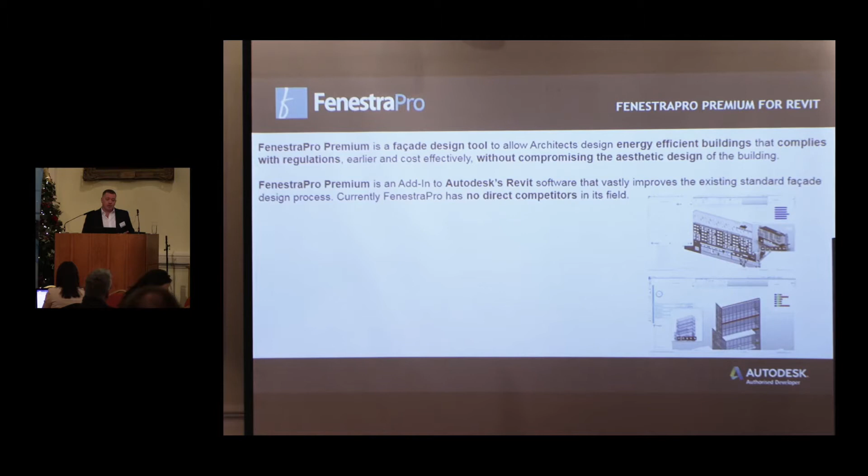We've got no direct competition. There are analysis tools out there, like Insight 360 or Sefaira or IES, for example, but we're very much complementary because we could be used much earlier in the process. We work closely with Autodesk in terms of that complementary nature of early stage design around the facade, with the likes of Insight when you get into doing your full end energy analysis, as they describe it.

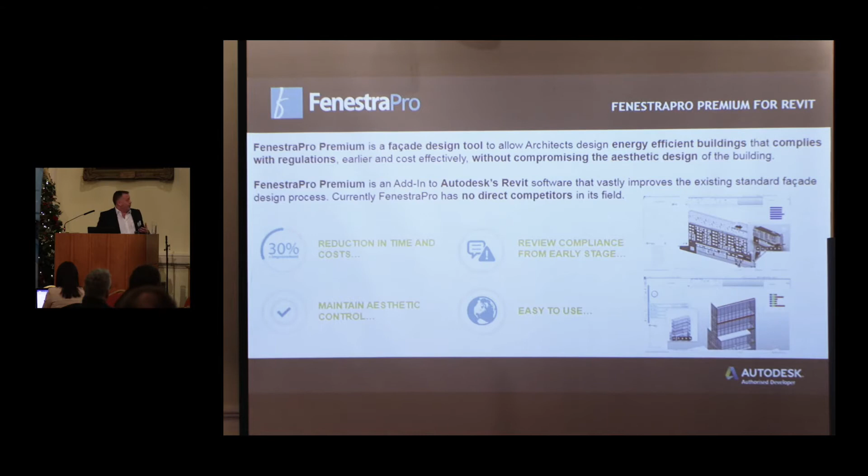In terms of the value we offer customers, we give architects the ability to understand their design decisions and strip out a lot of the complexities typically associated with HVAC, lighting, systems and boilers. You're giving architects the tools to understand the impact of their design decisions.

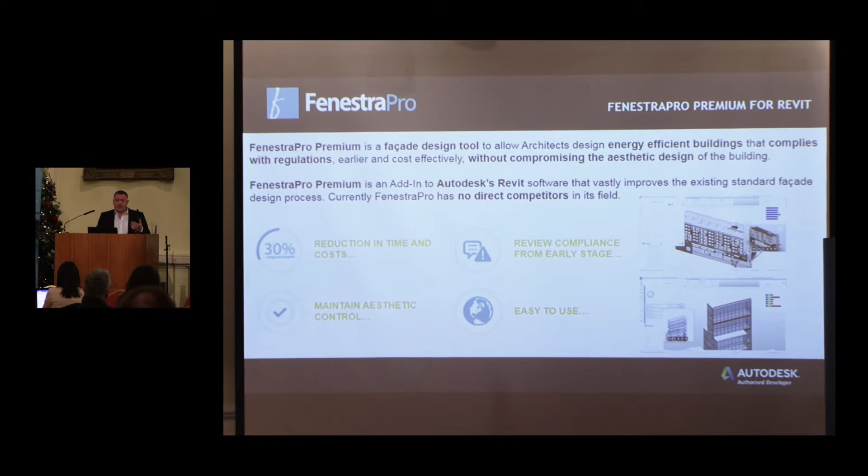If you think about it, the facade is the primary moderator between your internal and external environment, and influences over 50% of the energy performance of the building. But it's also the realization of the building. Coming from an architectural background, what we've tried to do is marry performance with the desired aesthetic.

By giving architects understanding of those implications early in the process, it improves their process. They effectively eliminate the need for late stage redesign once the engineers get involved and start looking at what impact the facade is having on the building. Because they already have a good understanding of its performance, they don't have to redesign. So it's a good improvement.

From an architect's point of view, one of the softer benefits of FenestraPro is that it gives them the ability to maintain control over the aesthetic, but also enables them to review compliance from that early stage. One of the key things is that our software is really easy to use, and because we strip out a lot of the complexities I mentioned, it's available to the full design team.

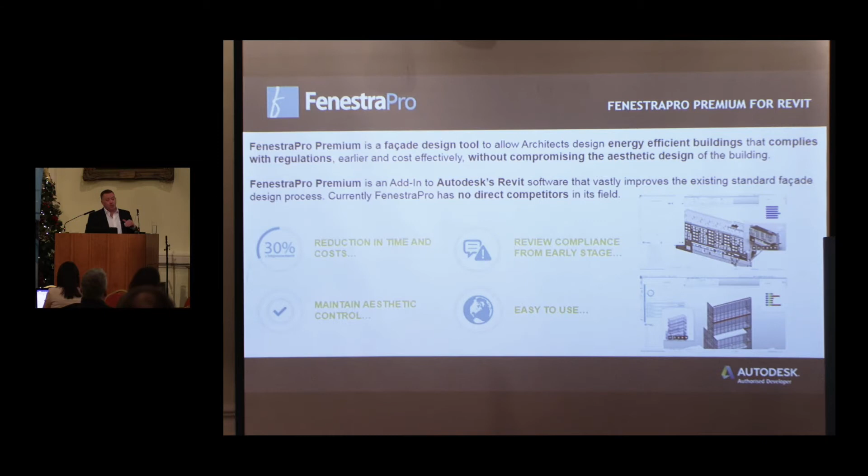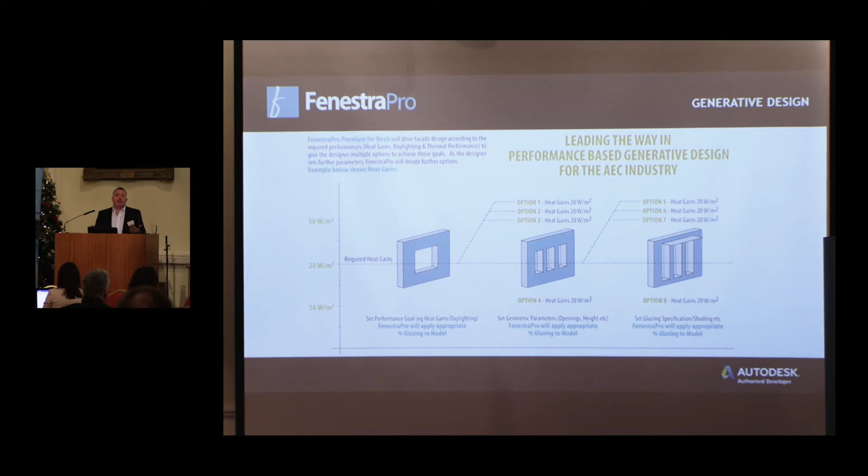I mentioned that we're an add-in for Revit, which enables us to read from, but also write to, the model. As you're establishing these key design parameters, we see ourselves as leading the way in generative design. You can set performance criteria, establish your glazing configuration to meet the aesthetic, and then automatically generate facade solutions. You'll see that in the quick demonstration I have here.

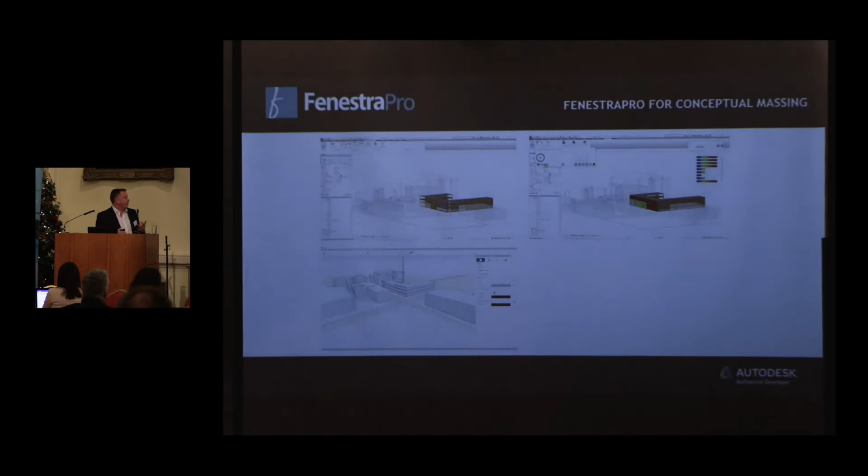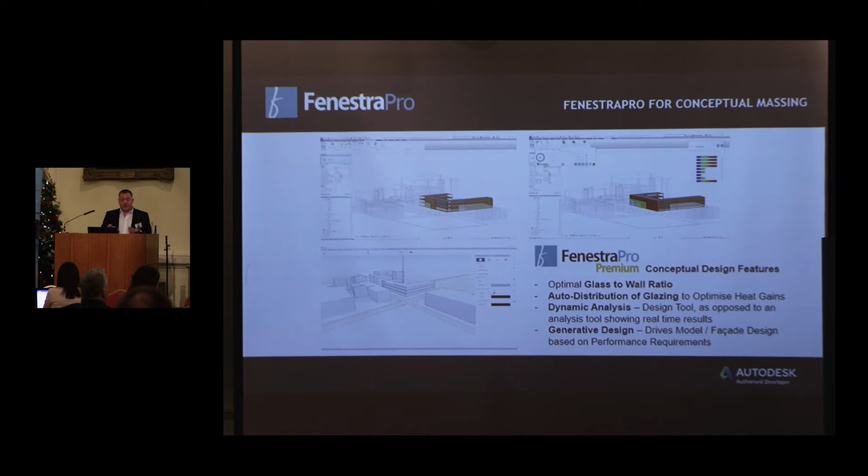We work from the earliest point of the process, through the conceptual design tools in Revit, all the way up to detailed design. In the conceptual tools, we're focused on establishing your glass to wall ratio based on thermal performance. We look at how you optimize the distribution of glass depending on orientation, location, and the impact of surrounding buildings, to maximize passive heat gains while maintaining daylight levels.

In the detail model, you're moving from a conceptual stage, where you don't necessarily have elements within the model, to a detail model where each window has a performance criteria typically set in the analytical properties. It becomes about the specification of the glass and what kind of shading you need based on those things. A big part of what we're doing is also producing data.

We use the Forge platform to present our key findings in terms of the data highlighted around heat gain, daylighting levels and so on. We also have an Excel export function that gives you the ability to report back to clients. The best way to talk about Fenestra is to just give you a quick demo, a quick 2-minute video.

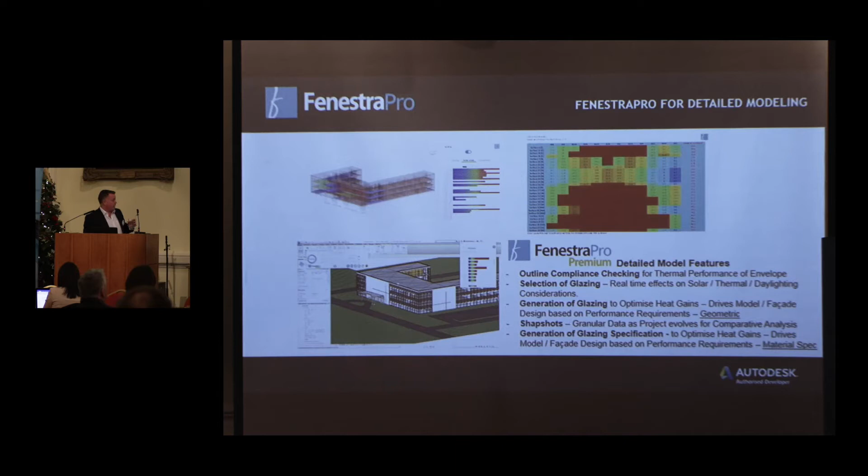That I can talk through as we go. Once it plays, there we go, we've got it.

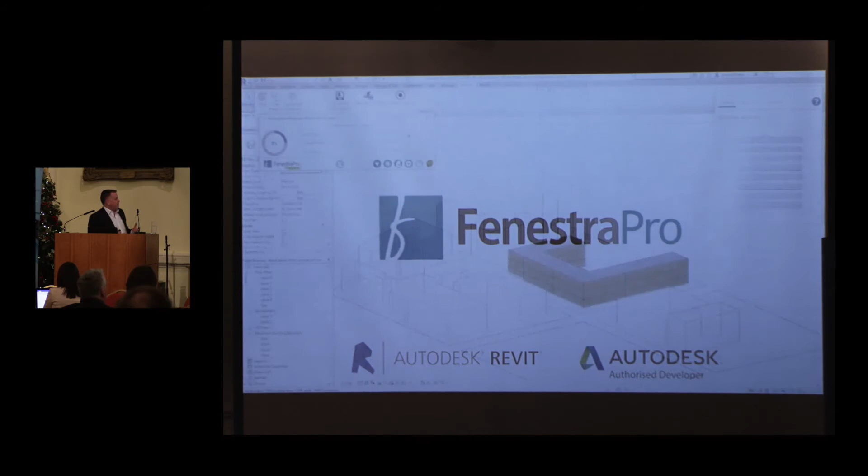As I mentioned, we work very much in that early stage piece, within the conceptual design tools in Revit. What we're doing is establishing, based on your typical high-level U-values for your roof and floor, the U-value for the facade itself. When you put in your glass performance levels and wall performance levels, it tells you what your glass to wall ratio is.

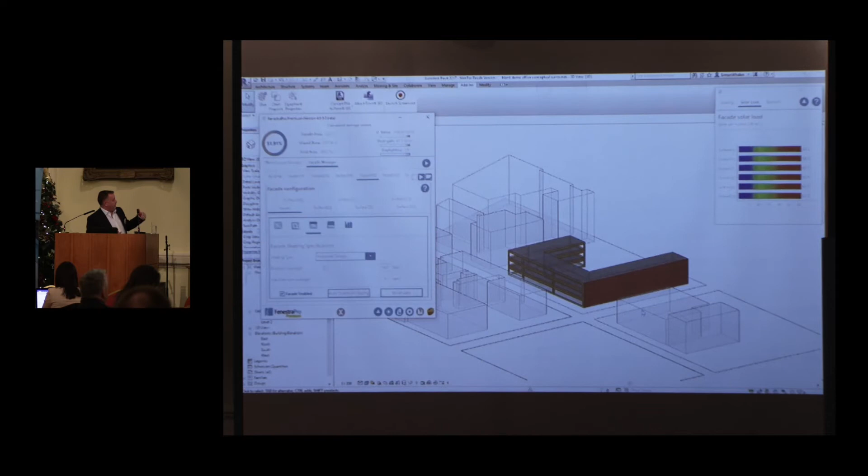As you start making those changes, it writes directly to the conceptual model in this case. You can then start looking at the impact of shading devices, and as you change the shading within Fenestra Pro, the impacts of that can be seen when you recalculate.

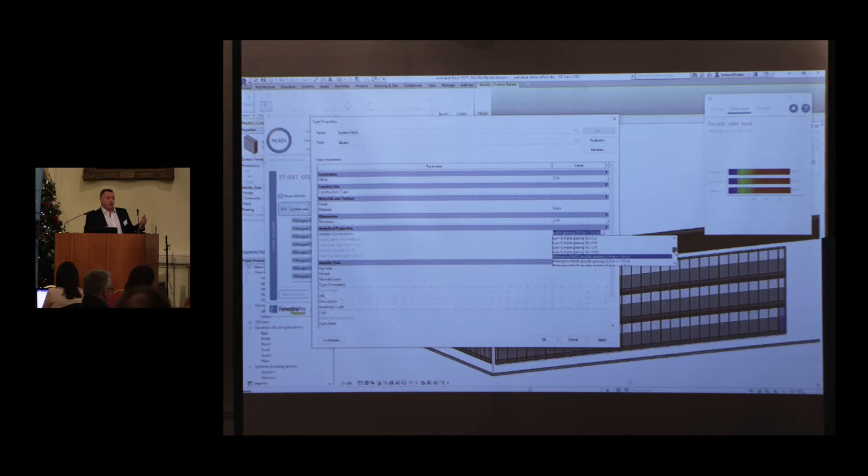You'll see constantly where you can see your thermal performance levels, your daylight levels, and your passive solar heat gain. When you move into the detail model, we're very much around how you manage specification of materials. This is appropriate for the work we're doing around Quantum, whereby you can select the glass material, all managed through the analytical properties within Revit, using the constructions XML file. You can change the glass and look at the impact those changes have on heat gain and daylighting.

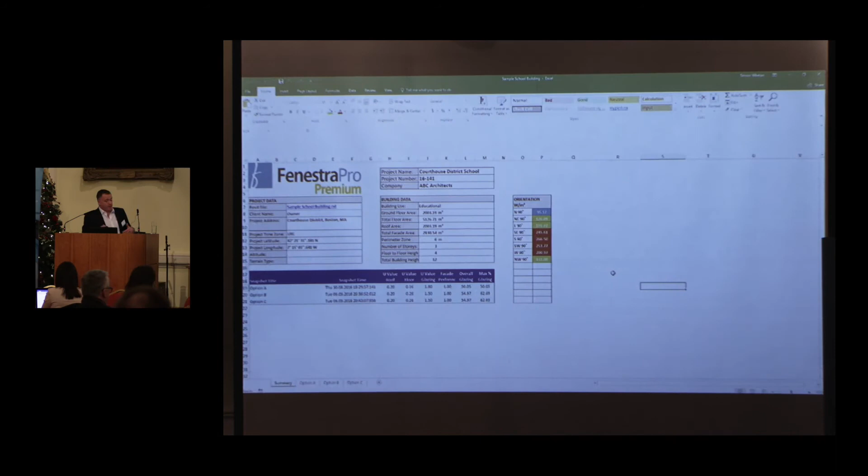As I showed earlier on, you can export Excel information, which gives you the heat gain levels and daylight levels for each surface, for each orientation, for each facade.

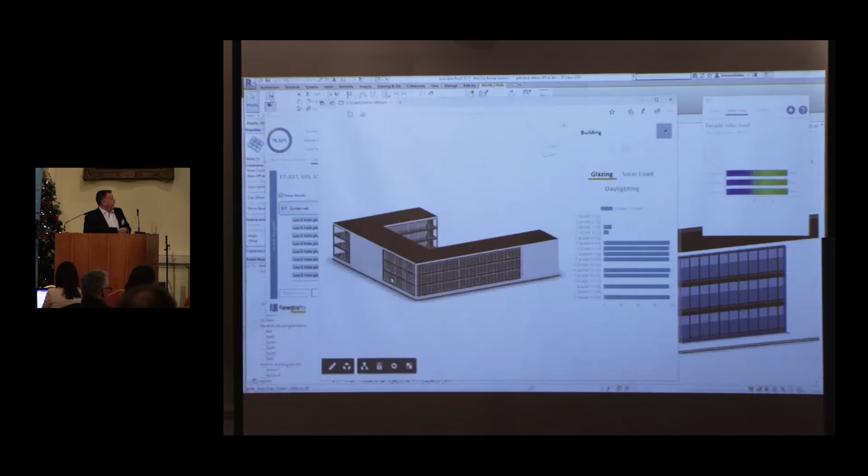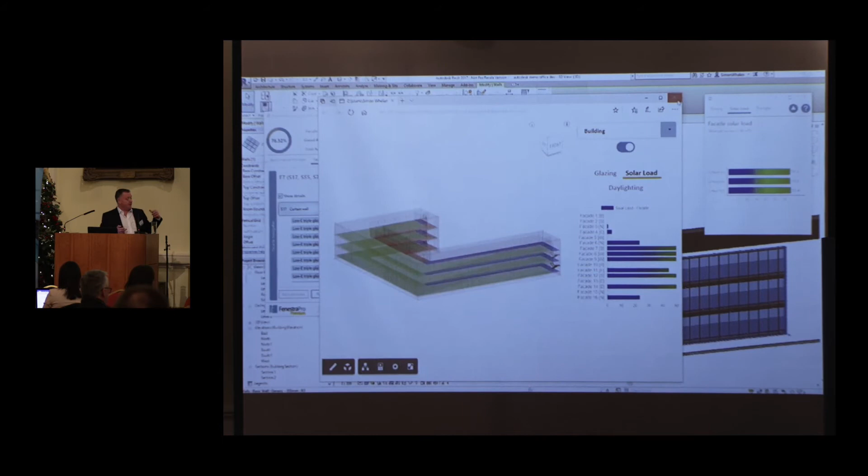This is how we present the data that we're looking at on the actual model, using the Forge platform in terms of how you export and manage that information. That's also some of the work we're doing around Quantum, which I'll touch on again in a moment.

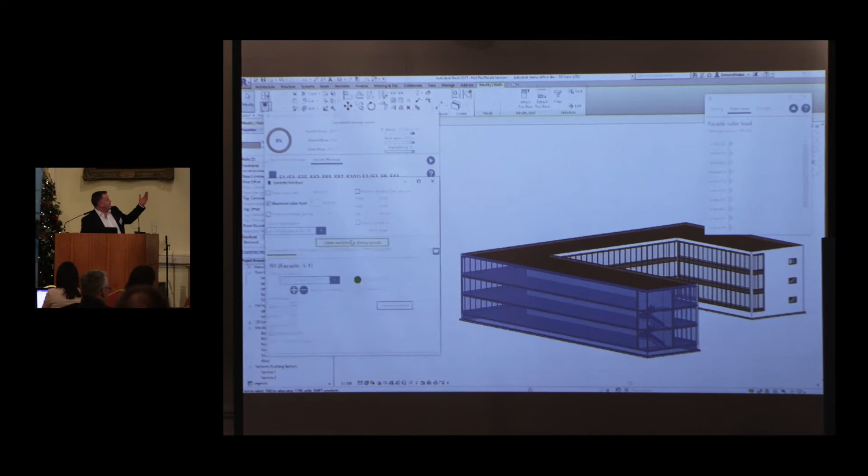We talked about generative design. The idea here is you've got a building where you don't have any windows on, let's say, two of the facades. You can select both those facades and choose to add a window, and look at percentage glazing, or look at maximum or target solar loads. You can put your solar load requirement in, preview what the glazing would be, then start putting in configurations for your glazing.

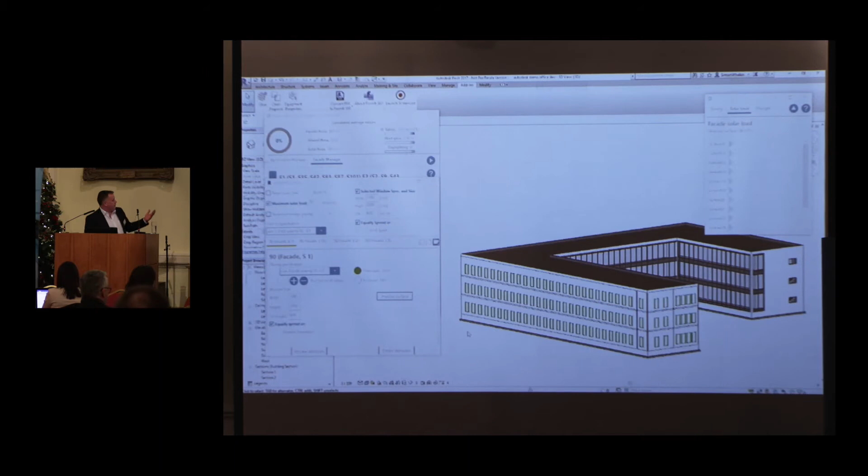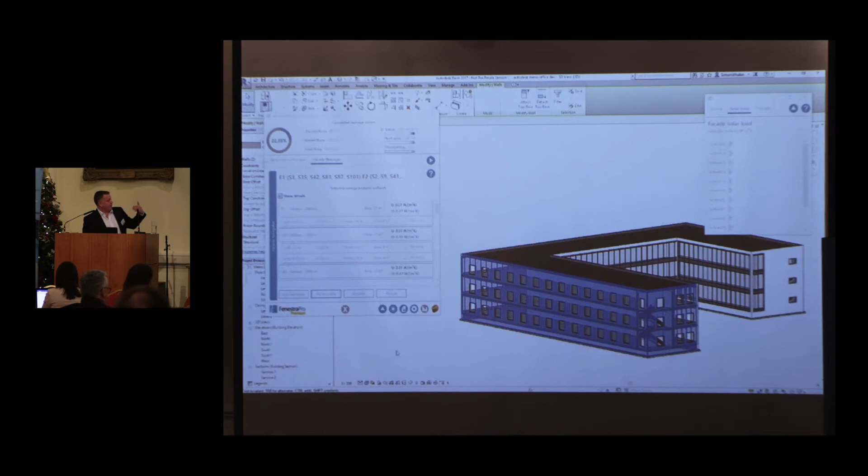In this instance, putting in one meter by two meters, you get an idea of how the buildings look. You can change that, and it automatically generates the glazing from the FenestraPro family onto the model, where you can get an understanding of the performance levels associated with that in terms of heat gain as well as daylight and thermal performance.

So that gives you an overview of what we're doing with FenestraPro in terms of the current software. I mentioned earlier on that we have some of the leading firms.

We've got the top five global firms in the US using the software, including AECOM, IBI, Perkins Will, HOK. We also have a wide range of clients in the US, the UK, Scandinavia, and our friends in O'Mahony Pike here in Ireland are using the software also.

I mentioned this partnership with Autodesk, and I'm not here to promote Autodesk, but just to give you an idea, we have an industry partnership where we have a sales and marketing agreement partnership and a development partnership, and that development partnership is focused around Quantum, which I'm going to talk about briefly now.

We've built a core product for that, which we launched at Autodesk University in Las Vegas about three weeks ago, and I'm going to show you some of the stuff we're doing around that.

For those of you who don't know Quantum, sometimes I ask myself, do Autodesk really know what Quantum is, to be honest, but to give you an idea, it's moving from file-based sharing, where you've got a Revit file that you're sharing using, say, BIM 360, to a central data model. Simultaneously, while you have your Revit model open, there's a live data transfer link to a central database that contains all the information.

So as an architect, when you change a wall, it changes on the central data model. And that gives an opportunity to link in with fabrication and construction.

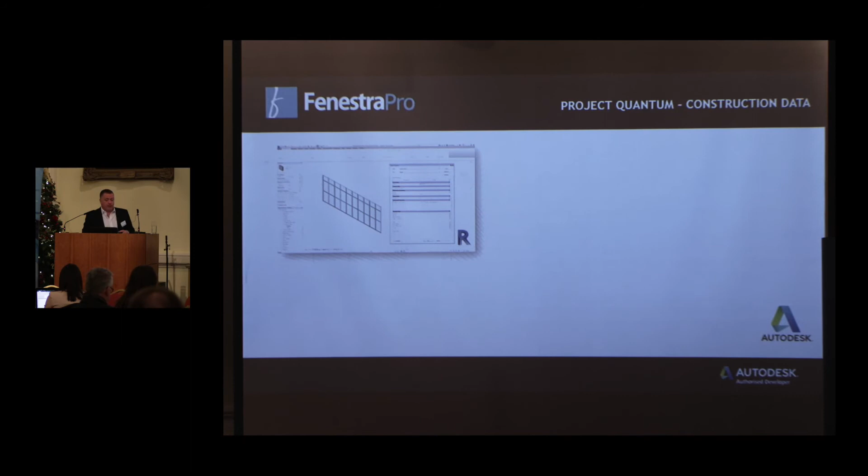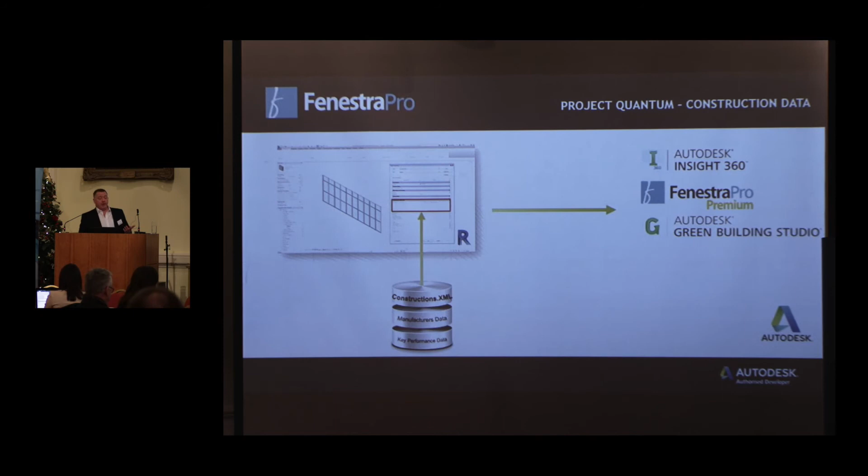So for those familiar with Revit, when you have a material, property, or element within Revit, the analytical data we use for FenestraPro, GBS, and Insight is controlled through the construction's XML file. That is fed into software like ours for calculating thermal, solar and daylighting performance.

But the problem is you can't feed that information back, so it's a one-way path. The other problem is that the construction's XML is hard-coded in Revit. It hasn't been updated in about 10 years, so it's very much out of date.

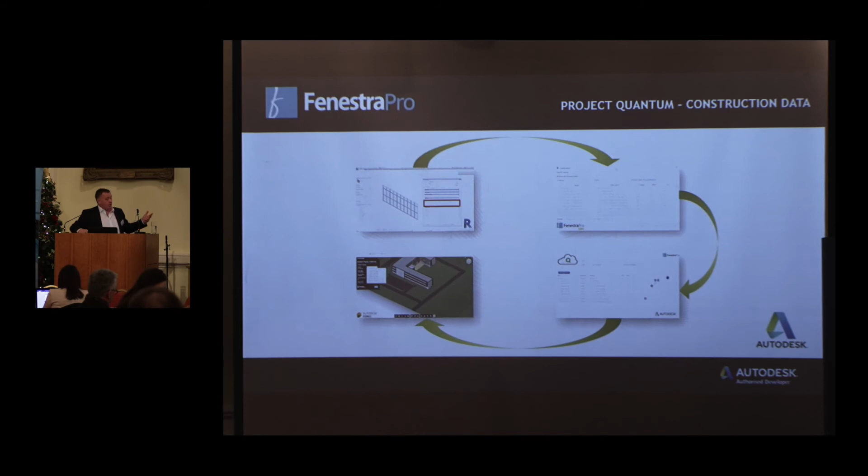What we've done is build a constructions add-in called FenestraPro Link, which basically overrides the constructions XML file. It also live links through Quantum, through this high-frequency data management, to a Quantum-based or cloud-based database that provides information back into the constructions add-in, fed through the Forge platform, and then back into Revit. That's all managed around the Quantum environment.

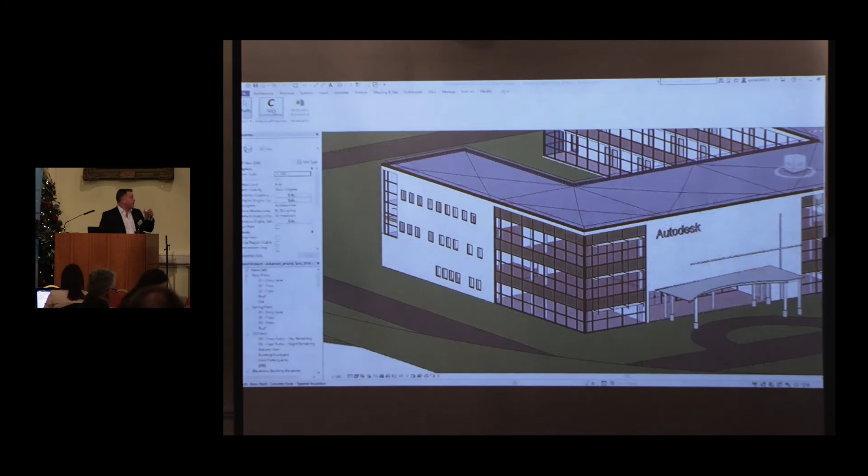Probably the best way to demonstrate this is to show you a quick video to give you an idea of what we've built. So you've got this idea whereby, as I mentioned, you have a constructions add-in when you open Revit. That information there is live linked to the Quantum database.

When you change something on the Quantum database, it automatically updates, you're not downloading or uploading information. When you have your linked databases on Quantum, you've got all that. In this instance, you've got the glazing information.

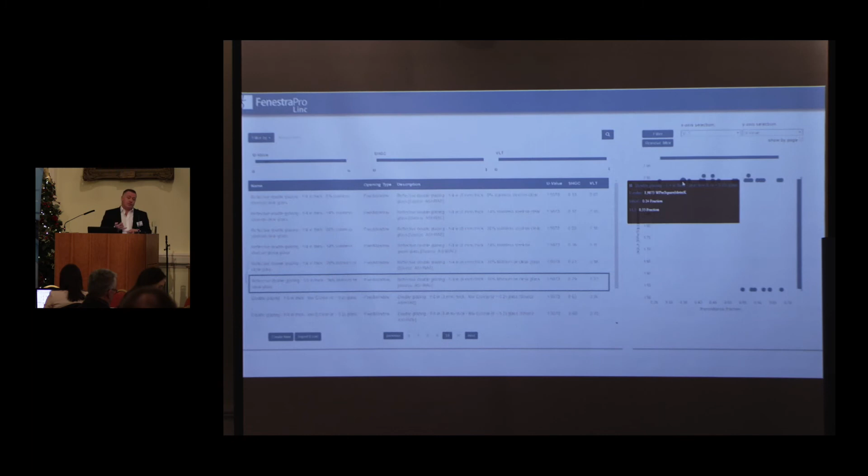We're very much focused on delivering a solution for glass manufacturers, whereby you can search based on performance criteria such as U value for the glazing, solar heat gain coefficient, or visual light transmittance. So when you start looking at alternatives, you can manipulate and navigate your way around the glazing database based predominantly on the performance of the glass, but also linking in with manufacturers and that sort of stuff.

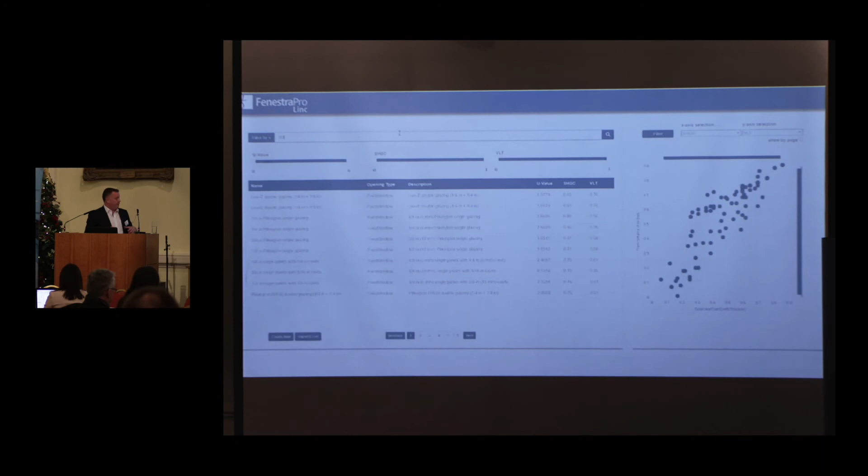You can choose your glass at this point, and then it's available to the Revit user in a live link in Revit. What we're doing is making this available to architectural firms, but in a way that they can manage their information. There'll be an administrator who can control the data flow to the users within a firm, and this information is then made available in Revit.

You can also add in your own glass types, beyond the manufacturer's information available through the database. You can create your own glass types within firms, going onto a Pilkingtons or a Saint-Gobain, using a product selector to select the glass type, then put in the name of the glass, manufacturer description, and the three criteria in this instance: U value, solar heat gain coefficient, and visual light transmittance. That feeds back into the general design.

So when you're looking for a glass, you're looking to get a certain performance level, and that performance level will feed into the database and limit the selection of the glass down to 3 or 4 different glass types, 3 or 4 different manufacturers, and that's what you would use to specify the glass. So you're talking about appropriate selection.

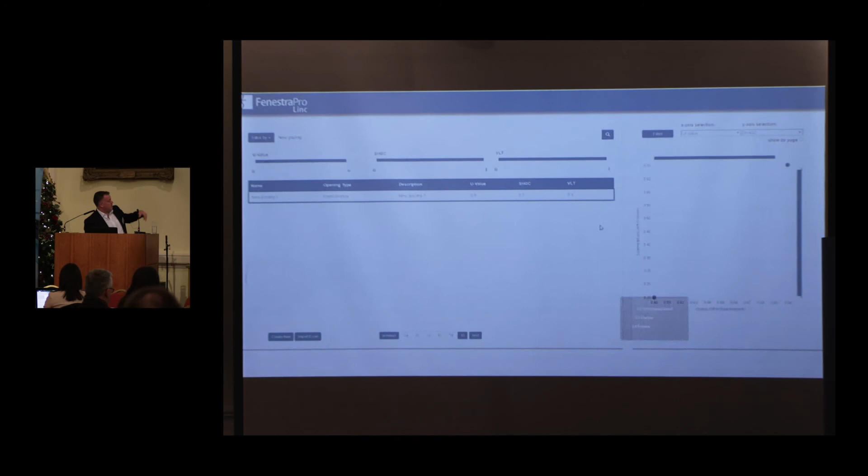Now, I mentioned earlier we've taken a thin slice with the glazing. So as you create 2 new glass types in this instance, when you go back into Revit, into the constructions add-in, the 2 new glass types created in the database automatically appear here. And when it gets interesting is that you can apply that glass, and it applies back into the analytical properties for that material. Then you can use software like FenestraPro or Insight 360 or GBS to actually fully test that glass.

And where it gets interesting, this is where Quantum offers good value in terms of what it does, it's also got a link to Forge. Forge is a platform, it's not just for Revit users, it's for the wider base of potential users. So it's accessible by contractors, manufacturers, subcontractors, whatever it might be.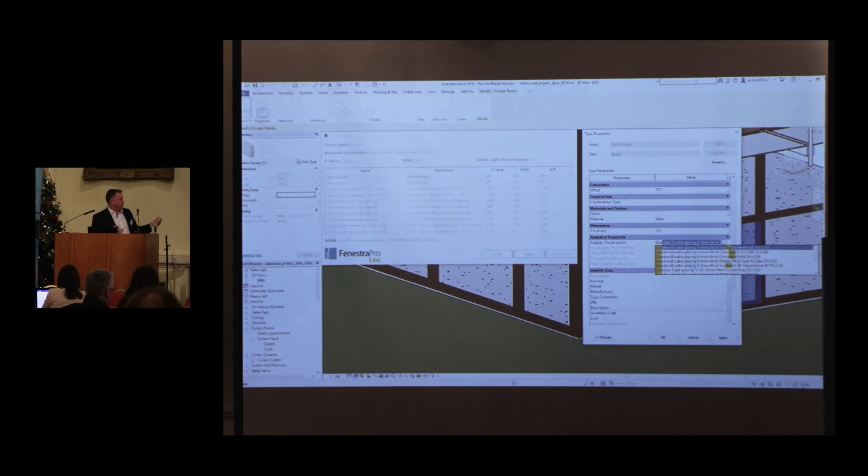Again, what we've built at the moment is the ability to live link into Forge, which is an online platform that takes the model, brings it in, you'll see it in a moment, and then within that model you can actually start changing the glass specification and recommend those changes.

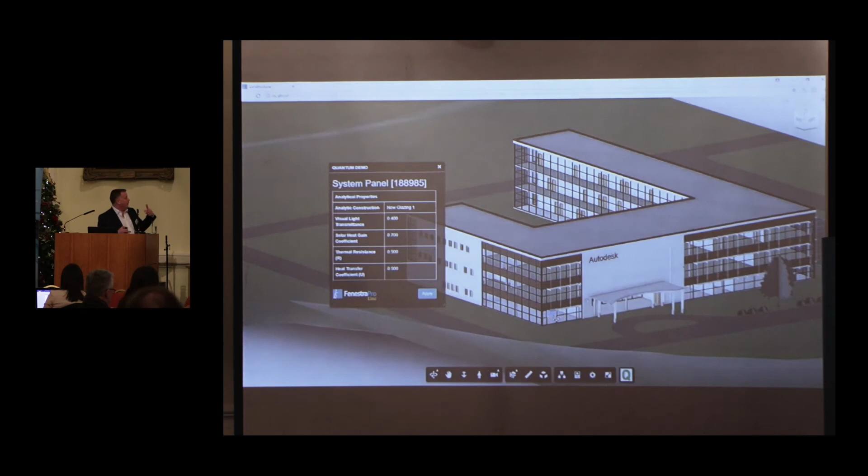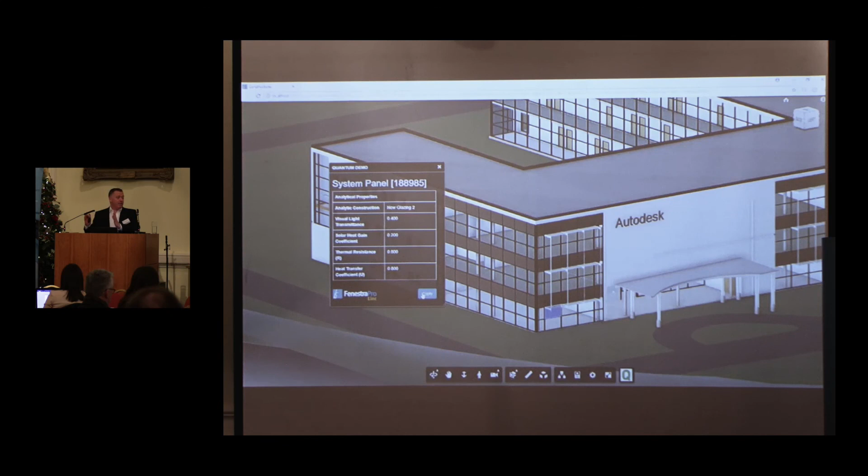So here's a simplified version of the model within Forge. You can go in, select the panel, change the glass for that, and apply it. What you're doing is applying from a web-based solution or platform, and it applies back into Revit, so you can actually change your glass specification from Forge.

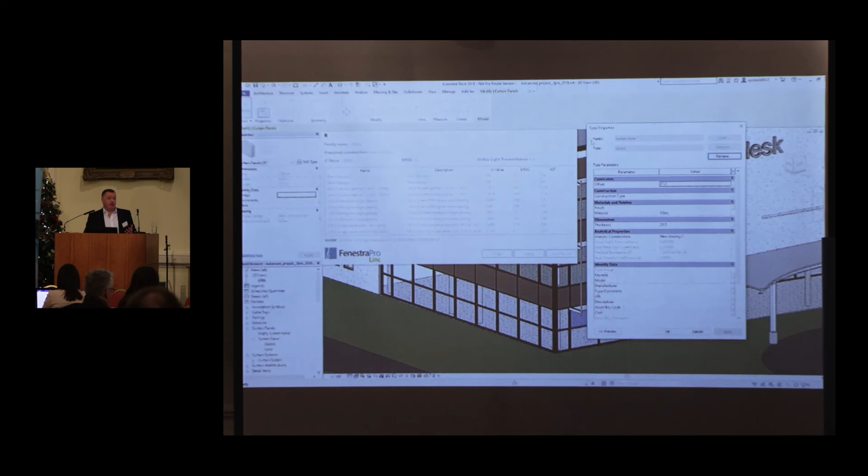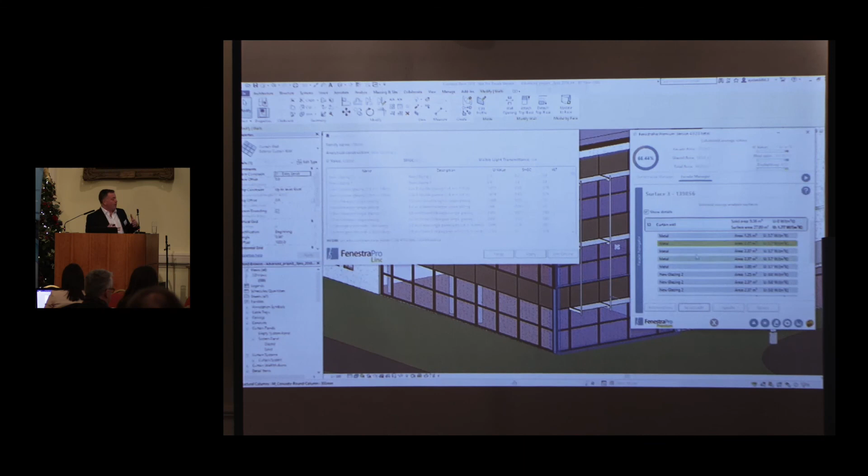So what I'm showing you here is really a beta version of what we're working on with some of the leading manufacturers and architectural firms globally, to beta test and implement this over the next while. We'll extend it from glass into multiple product systems. The next piece obviously will be curtain wall systems, mullions, transoms, all that kind of stuff. I think that hopefully gives you a bit of an idea.

And what we're doing with Autodesk, and again I'm conscious I'm talking a lot about what we're doing with Autodesk, but it links in things like Revit, Forge, GBS, Insight 360, and Fenestra Pro. Really, where we're going to take that, we're beta testing and launching Fenestra Pro Link at the moment. A big part of the play is that design link, design-make connection, whereby we're going to provide more detailed design data from fabrication into design.

We're expanding that from glazing systems into walls, roofs, and floors, etc. And as I mentioned earlier, using the rules selected within the database for controlling that data, the fabrication rules or construction rules around that are automatically fed back into that general design piece. So when you're generating a curtain wall, you're doing that within the confines of certain rules. I suppose where we're taking that is the ability to actually bring in products like Inventor and Fusion into the design process more than what's been done in the past, which gives you the ability to detail more sophisticated systems.

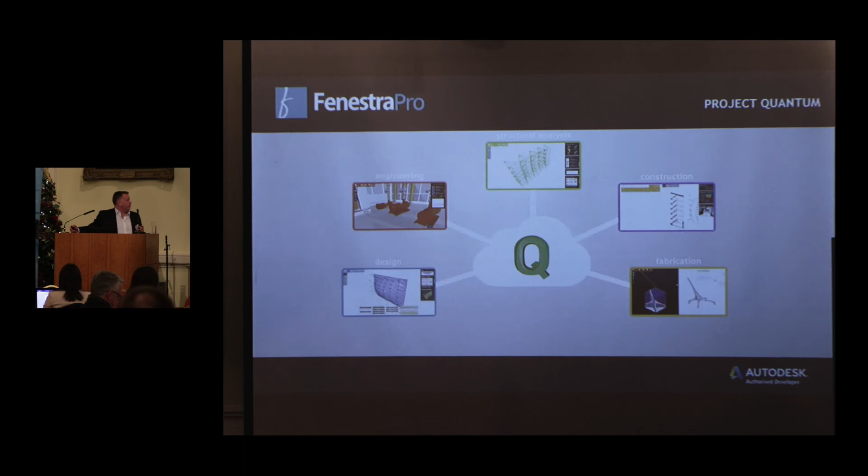So hopefully that gives you an idea about what we're doing on Quantum, some data management information, and the future of data management information. I think we can take some questions in the Q&A, but for now I'll leave it at that.

So 20 minutes. 15 seconds short, so I'll just sing a song for 15 seconds. Thanks very much.